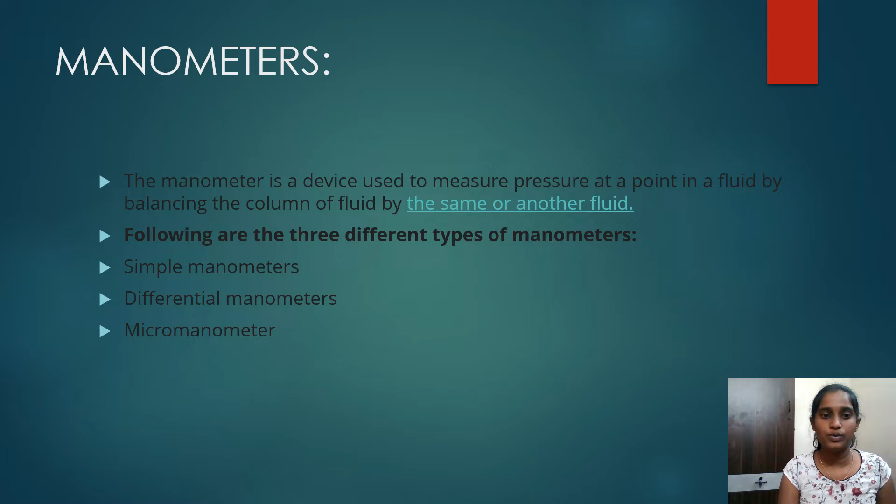My topic for concept video is types of manometers. Manometers. The manometer is a device used to measure pressure at a point in a fluid by balancing the column of fluid by the same or another fluid. Following are the three different types of manometers: simple manometer, differential manometers, and micromanometers.

Simple manometer. A simple manometer has a glass tube, one end of which is connected to a point where pressure is to be measured and the other end remains open to atmosphere. Common types of simple manometers are piezometer, U-tube manometer for gauge pressure and for vacuum pressure, single column manometer, inclined tube manometer or sensitive manometer.

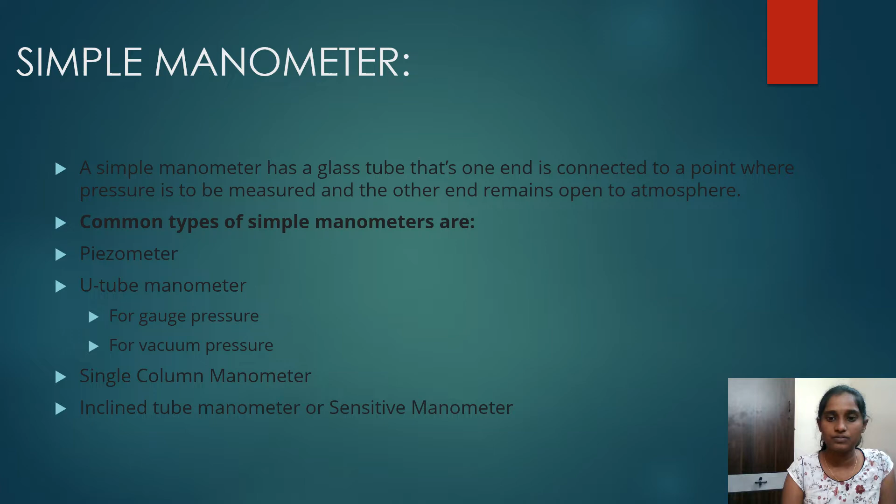Piezometer, for measuring the pressure inside a vessel or pipe in which liquid is there. A tube is attached to the walls of the container or pipe in which the liquid remains, so liquid can rise in the tube. By determining the height to which liquid rises and using the relation P = ρgh, a gauge pressure of the liquid can be determined. Such a device is known as piezometer.

To avoid capillary forces, a piezometer tube has to be about half inch or more. It is essential that the opening of the instrument be tangential to any fluid motion. Otherwise, an incorrect reading will result.

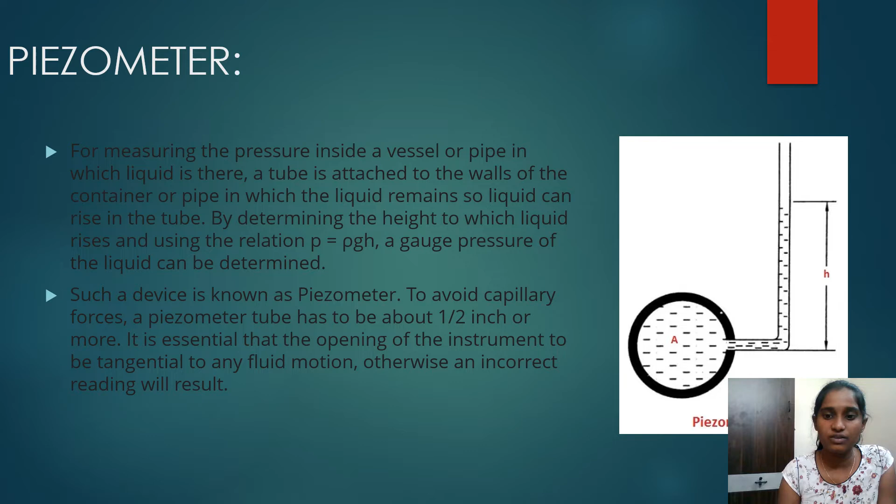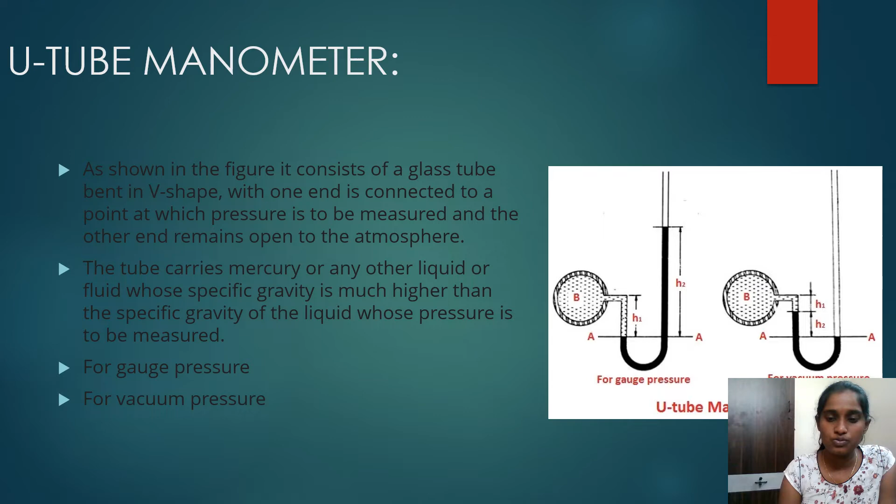U-tube manometer. As shown in the figure, it consists of a glass tube bent in U shape, with one end connected to a point at which pressure is to be measured and the other end open to the atmosphere. The tube carries mercury or any other liquid whose specific gravity is much higher than the specific gravity of the liquid whose pressure is to be measured. For gauge pressure, for vacuum pressure.

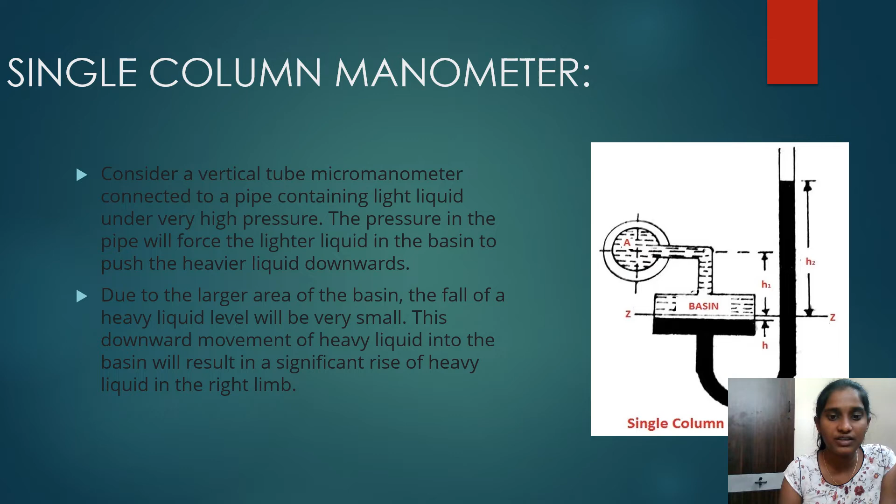Single column manometer. Consider a vertical tube micromanometer connected to a pipe containing light liquid at a very high pressure. The pressure in the pipe will force the lighter liquid in the basin to push the heavier liquid downwards. Due to the larger area of the basin, the fall of the heavy liquid level will be very small. This downward movement of heavy liquid into the basin will result in a significant rise of heavy liquid in the right limb.

Inclined tube manometer. If the vertical tube of the micromanometer is made inclined, as shown in the figure, then it is called inclined tube micromanometer. This type of inclined micromanometer is more sensitive than the vertical tube type. Due to inclination, the distance moved by the heavy liquid in the right limb is comparatively more, so it can give a higher reading for the given pressure.

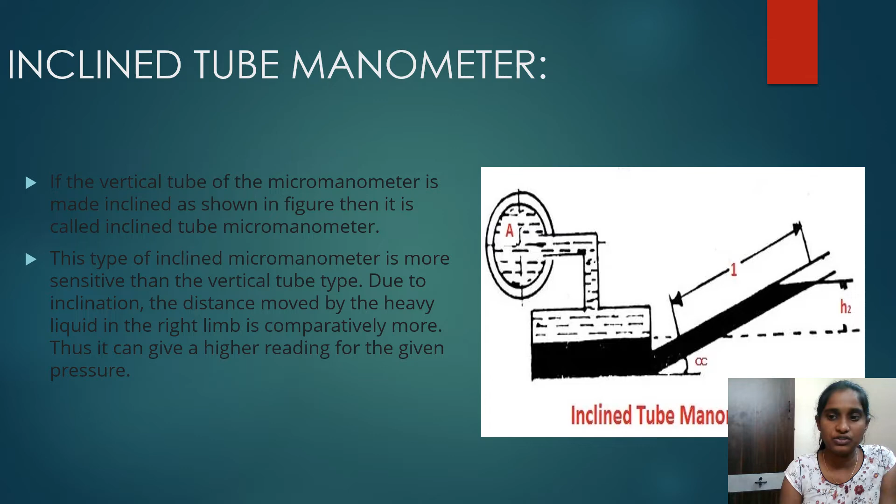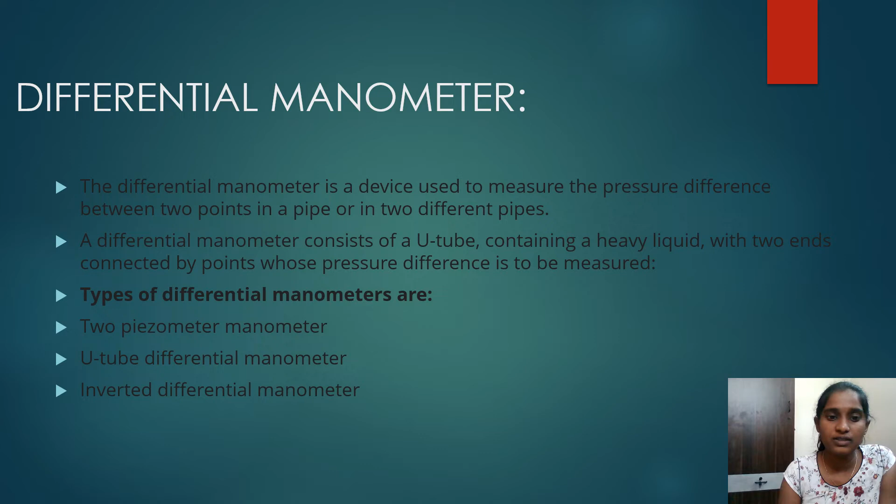Differential manometer. The differential manometer is a device used to measure the pressure difference between two points in a pipe or in two different pipes. A differential manometer consists of a U-tube containing a heavy liquid with two ends connected to points whose pressure difference is to be measured. Types of differential manometers are two piezometer manometer, U-tube differential manometer, inverted differential manometer.

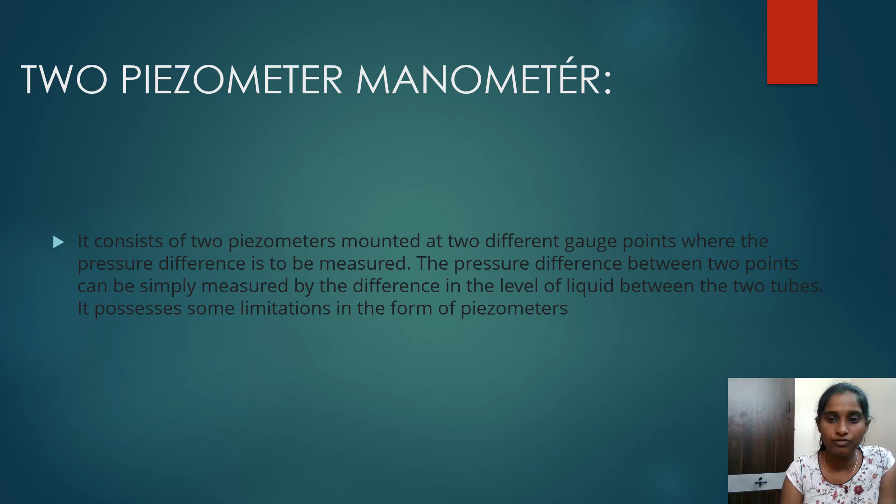U-tube differential manometer. It is a device that is used to measure the pressure difference between two points in a pipe or between two different pipes. This manometer consists of a U-shaped tube containing a heavy liquid. The two ends are connected to two desired points in the pipe whose difference of pressure is required.

Let pressure at point A be more than the pressure at point B. Then the greater pressure at A will force the heavy liquid in the U-tube to move downwards. This downward movement of the heavy liquid in the left limb will cause a corresponding rise in the heavy liquid in the right limb.

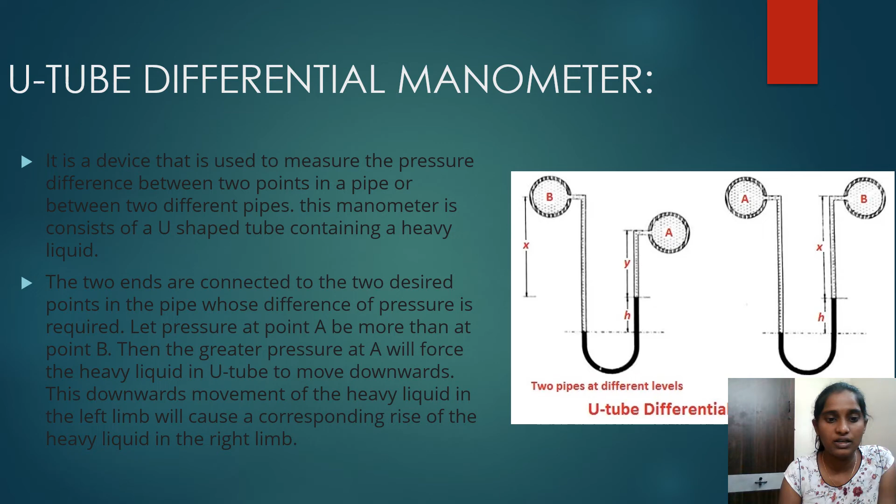Inverted differential manometer. In this type of manometer, the U-tube is inverted and contains a light liquid. The two ends of the tubes are connected to the points whose pressure difference is to be measured. It is used for measuring the difference in low pressures. The figure shows an inverted U-tube differential manometer connected to the two points A and B. Let the pressure at point A be more than the pressure at point B.

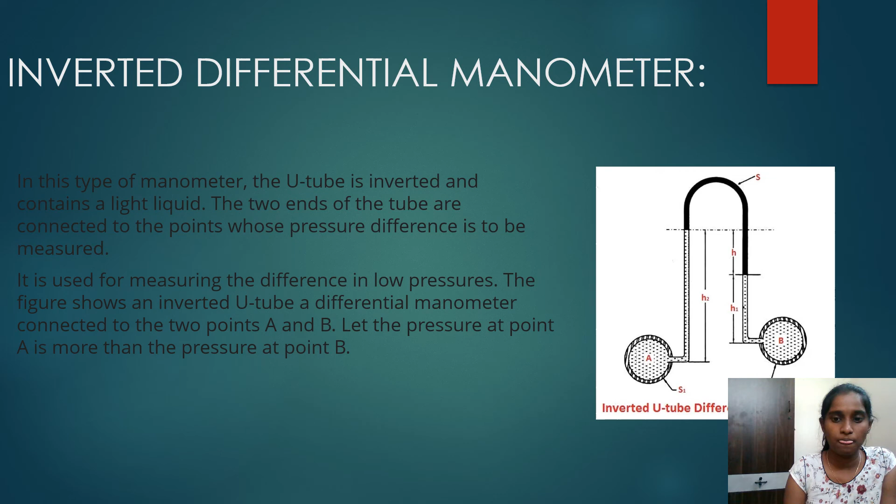Advantages of manometer. Following are the main advantages of manometer. It is simple to construct. It has great accuracy. It is used to measure pressure. It is used to measure temperature, flow, and other process variables.

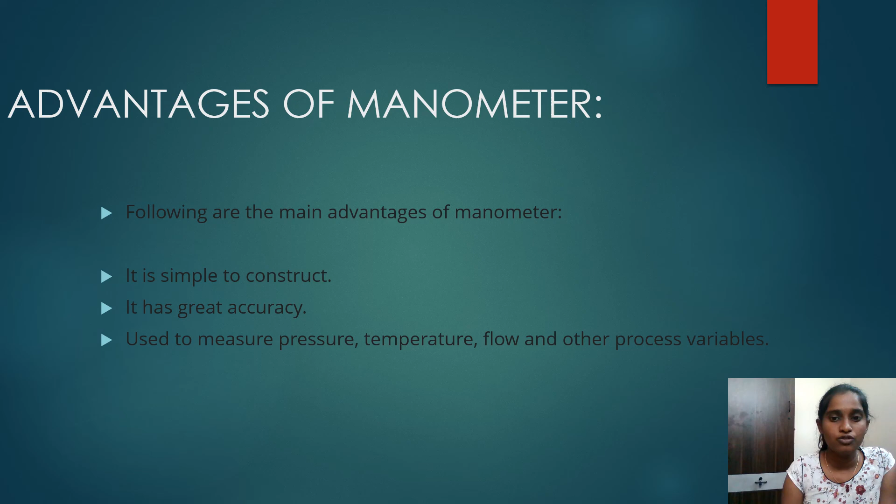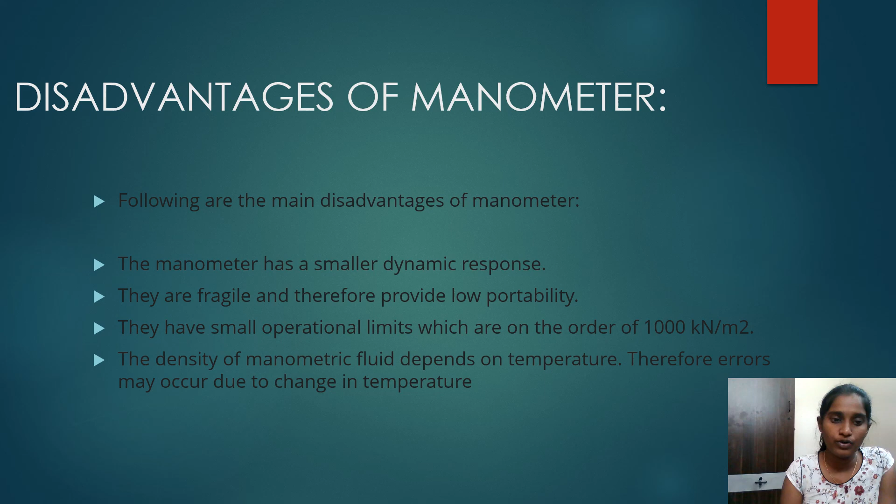Disadvantages of a manometer. Following are the main disadvantages of manometer. The manometer has a smaller dynamic response. They are fragile and therefore provide low portability. They have small operational limits which are on the order of 1000 kN per meter square. The density of manometric fluid depends on temperature. Therefore, errors may occur due to change in temperature.

This is all about the types of manometers.